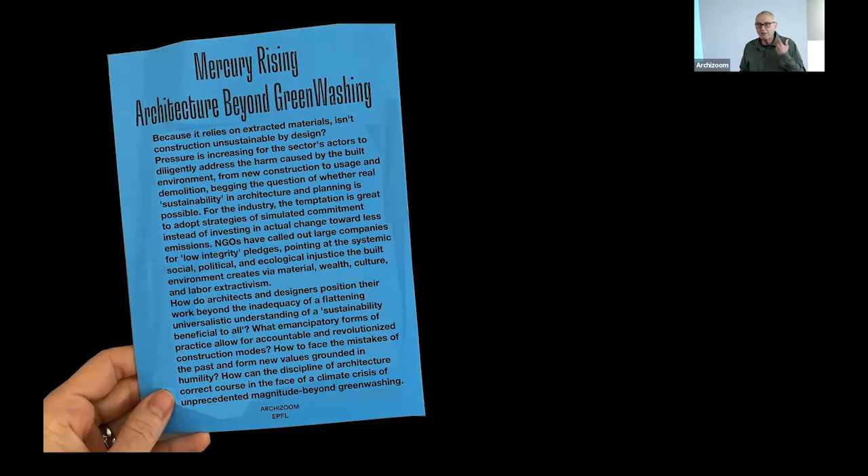And I'm also greatly looking forward to discuss with you the propositions that I have received from the faculty, an absolutely radical proposition, brilliantly written. I received this a few weeks ago, and the statement opens with a provocative question: isn't construction unsustainable by design? A question undermining the very essence of what we have been doing as architects and what we do as architects. So this is an arrow going straight through the soul.

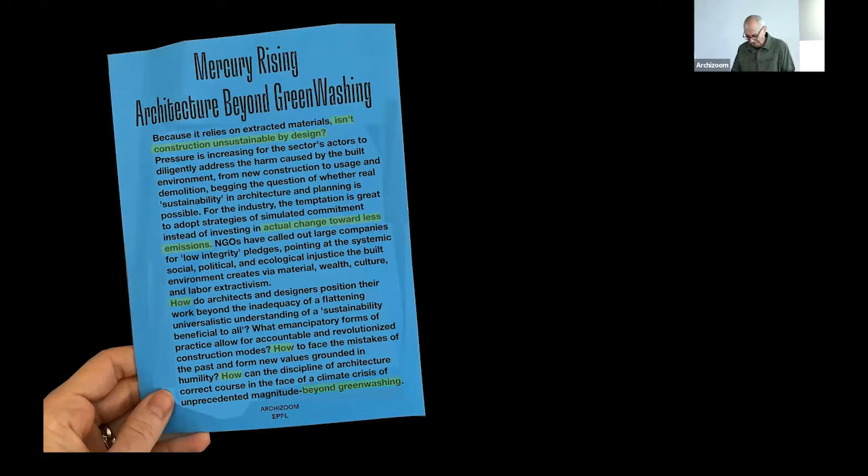The second paragraph is rather pessimistic, but there is an optimistic moment in it, calling for actual change towards less emissions. So this already tells you the direction in which we should go. Followed by the third paragraph, asking how, three times, how to face the mistakes of the past, to identify new trajectories grounded in humility, beyond greenwashing. The last two words are beyond greenwashing. So much for Mercury Rising.

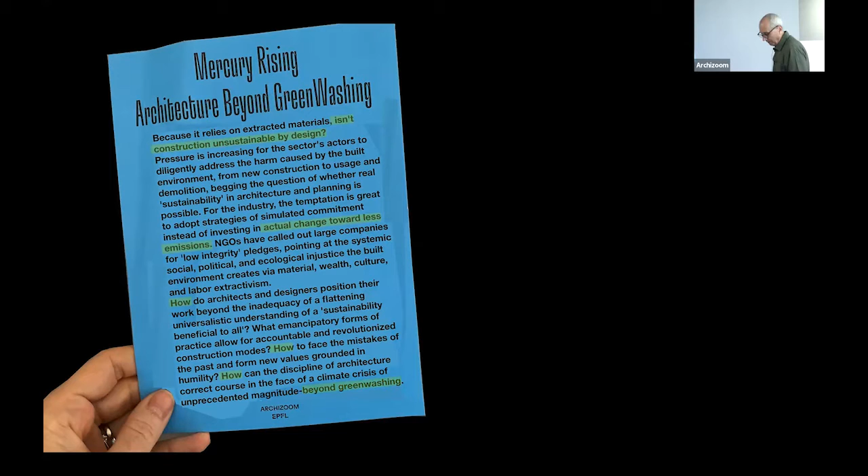I would like to address this statement by the faculty by addressing the ambivalent role of technology that is being deployed today in environment-making practice, as depicted in this illustration from a 2011 cover for The Economist entitled 'Welcome to the Anthropocene.' Whether called Anthropocene, Urbicene, Capitalocene, or Technocene, we have undoubtedly altered the face of Earth, shown here as a technical contraption in the process of being put together and taken apart, a form of geoengineering or geoarchitecture operating at the global scale.

This is the status quo condition. This contraption is unsustainable, to say the least. Any effort to fix the situation—some argue more technology is needed, a techno-fix, so to speak, to mitigate the negative effects of our actions on world climate. This takes me to the...

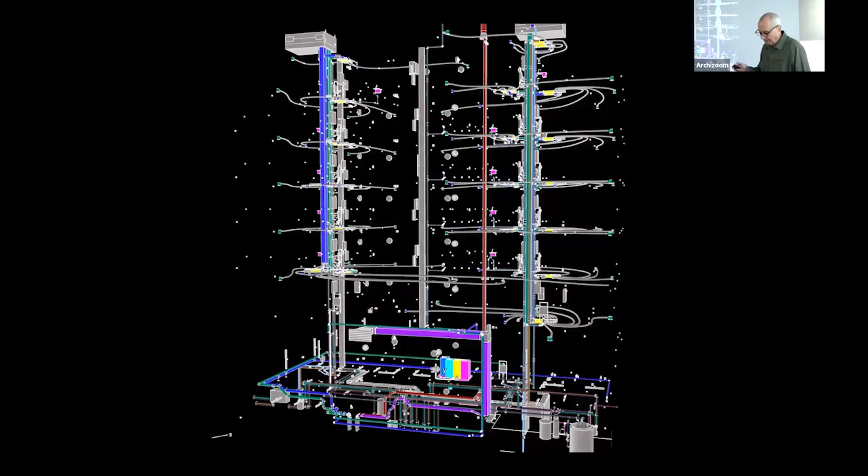theme of my lecture, namely the role of the technical systems deployed to create environments for habitation. In this case here, a recent building in Switzerland, a 7-story structure with workspaces and dwellings above, cooled by river water and heated by the city's heating grid, powered by the municipal waste incineration plant. In short, the pyrotechnics deployed today to not only create environments for habitation, but also habitats that, appearances to the contrary notwithstanding, would minimize the impact of architecture on climate.

Mind-boggling is the amount of technology needed to be sustainable. Each small dot represents a switch connected to other components, which are connected in turn to other systems—a machine in its own right, and a far cry from the call to be truly sustainable.

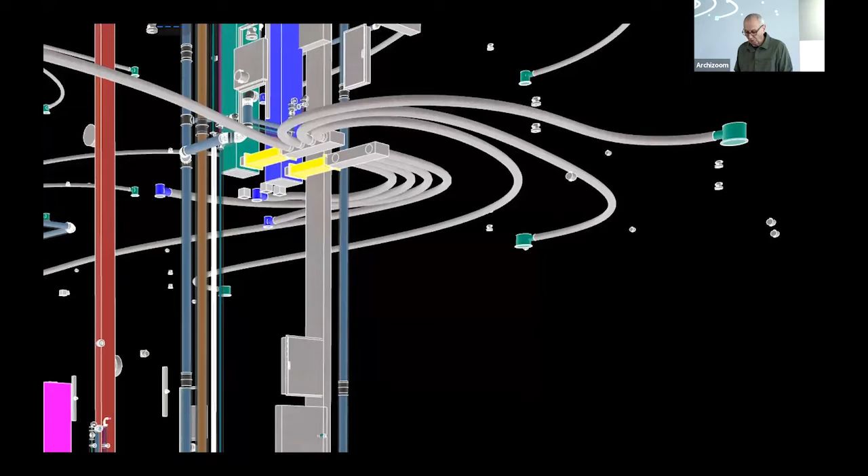My lecture is hence entitled HVAC—heating, ventilation, and air conditioning—plus water and sanitation systems, plus electricity and information technology. And is subtitled Beyond Architectural Pyrotechnics, a term coined by the Indian architect Charles Correa. These are the technologies that infiltrate our work these days, despite our suspicion vis-à-vis anything technical. We cannot simply push them aside in an act of psychoanalytical repression if we intend to address how to recalibrate the relation between architecture and its host environment today.

To walk the talk, I have organized my intervention as a shop talk on how we as architects in practice have tried in the past and try today to overcome the dilemmas associated with sustainable construction. I'd like to share some projects done in our Los Angeles and Zurich ateliers, understood as sites of architectural production, and foreground the struggles encountered when trying to act sustainably.

This is a story about failures from which we successively tried to learn. Or, in the words of Samuel Beckett from his 1983 novella Worstward Ho: ever tried, ever failed, no matter, try again, fail better. The good message for the students. The question, however, is and must be raised whether we still have the time to fail.

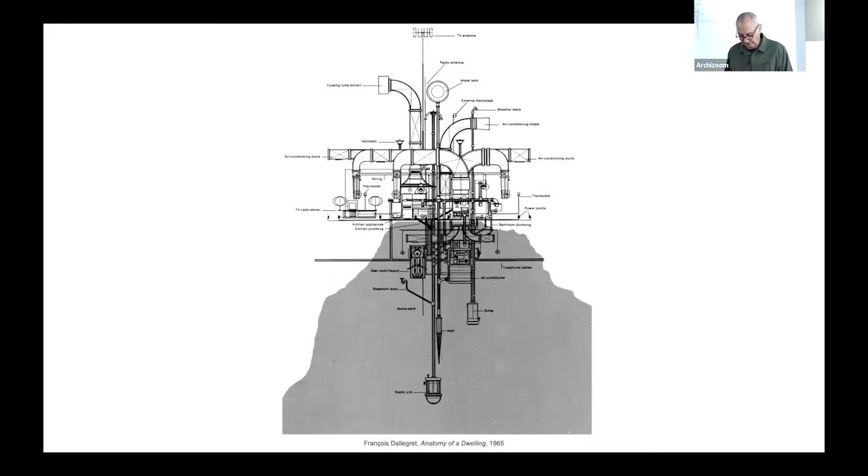Second quote: a fundamentally different approach is proposed by Charles Correa in his 1980 essay, Form Follows Climate. Surprisingly, he also talks of the building as a machine, though a machine of a very different order. From the vantage point of a practicing architect working in India, in the absence of sophisticated mechanical technology, operating from a tropical climate in a developing world, he writes: it is the building itself which must create the controls the user needs.

The house as a machine for living, controlling climate by means of verandas, terraces, courtyards, overhangs, intermediate zones, cross ventilation, the Venturi effect, solar energy harnessing, trees for shading, water as a humidifying element, using space as a resource itself.

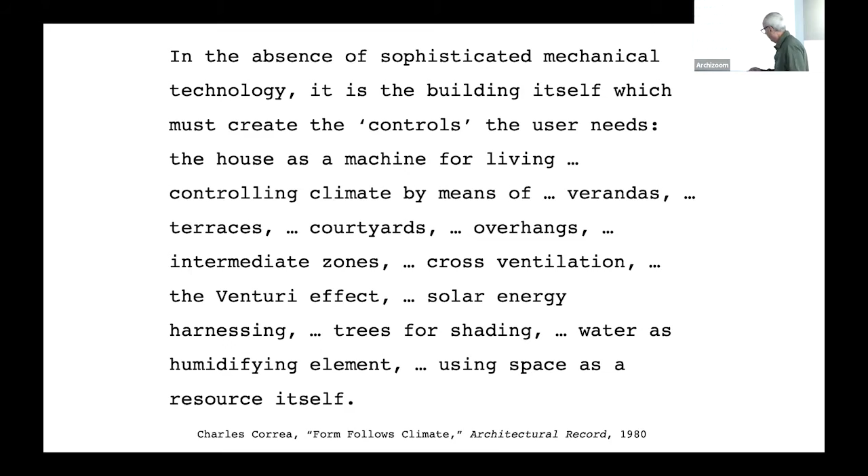Correa illustrates his idea with a section of the Red Fort at Agra, showing a sunken courtyard above which a horizontal curtain is stretched in the morning to trap the cool overnight air, providing shade during the day. In the evening, the curtain is removed, to be replaced again in the morning, and so the cycle continues.

He moreover extends his argument to the way users use the building in cyclical patterns of habitation. Correa makes a plea in favor of an energy-passive architecture, with architectural elements to control a space's microclimate—elements that could also be considered a type of technology. So architecture as a kind of technology, albeit a technology minus mechanical systems. Architecture does the job, and its form follows climate.

Third quote is found in a 1984 essay by Alvaro Siza entitled Living a House. Surprisingly, Siza also depicts the house as a machine, yet this time as a machine that breaks down and needs to be repaired. He writes, listen to the list again: the idea I have of a house is that of a complicated machine in which something breaks down every day - a lamp, a faucet, a drain, a lock, a hinge, a socket, and then the heater, the stove, the refrigerator, the television, or the video player. And after that, the washing machine, the fuses, the curtain springs, or the security bolts of the door.

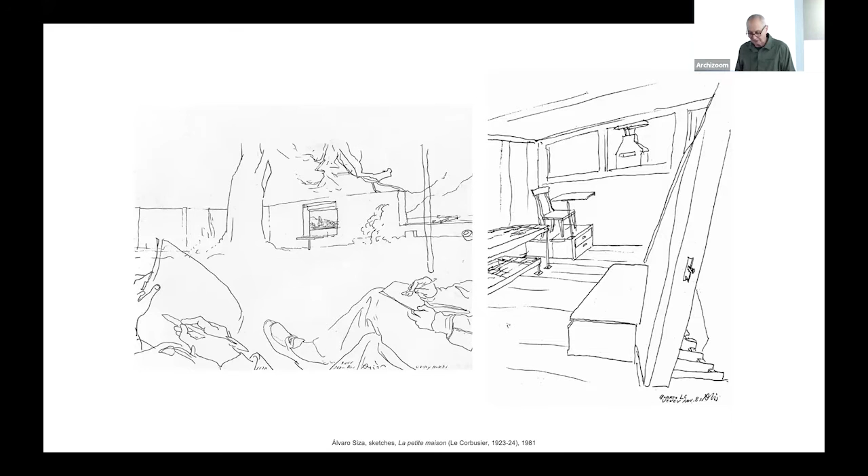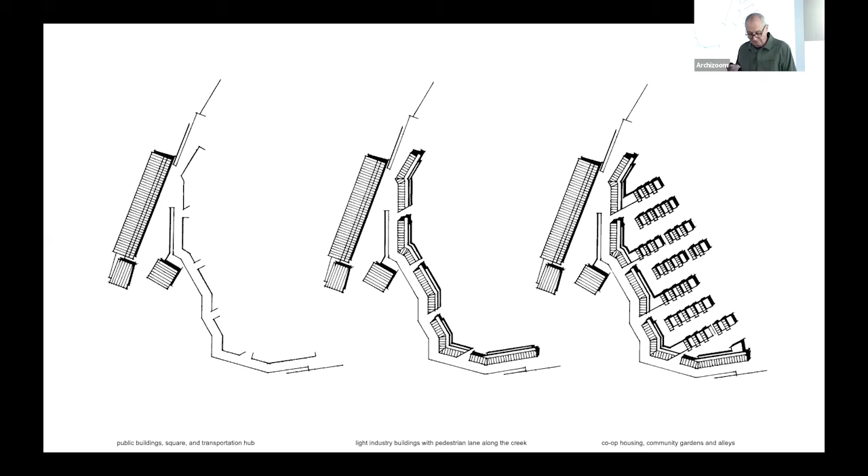So there were 3 different clients for this project. For the public part, on the left, the community, represented by the mayor, who believed in the project - this was very important that we had the mayor on our side. For the workspaces, 2 senior engineers who would evolve to become the patrons of the project, and a housing cooperative that was enthusiastic but did not have the means to build the project.

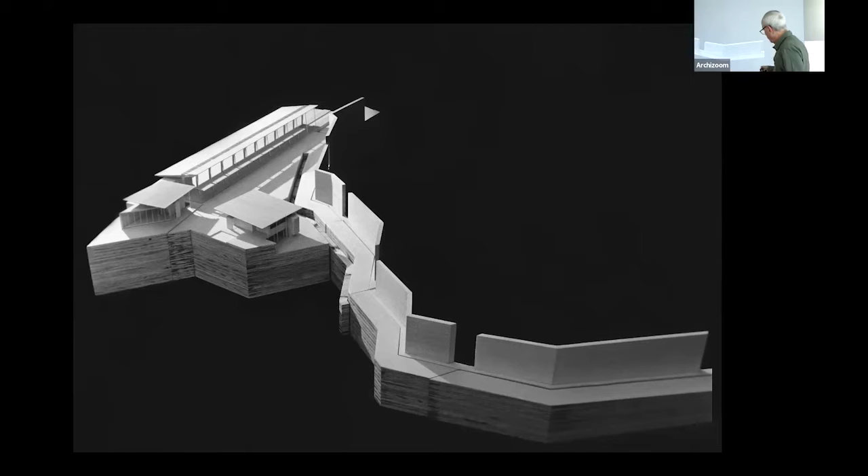In the model that you see in the next slide, the public spaces are located at the highest point of the site, and the sequence of buildings following the topography along the waterway are seen in this portion. So this is the square, the train station, the restaurant building, the post office.

A novelty at the time, the brief asked the participants to be environmentally conscious. We never heard that before in an architectural brief in 1989. This was revolutionary. The project thus evolved into a study on how to make architecture ecological before really understanding what this would entail - a way of doing without knowing, but at least with a hunch.

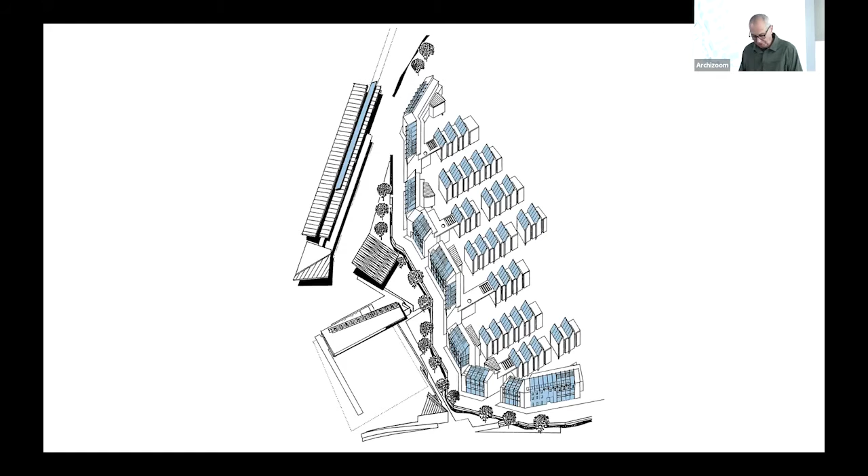So far, so good. We won the competition and started to work with the 2 senior engineers that were the mentors of the project on a manifesto that would become a roadmap for the first building along the creek. By the way, we did not know the term sustainability at the time, and used instead the complicated expression environmentally minded household management of resources. So this became the important point.

The 11-point manifesto put forth a series of action points, including the need to integrate buildings in the natural environment, to encourage multiplicity of uses, to use passive and active solar energy and natural light, to encourage the use of recyclable building materials, also with the idea to create a market for recyclable materials, and then lastly, to increase the lifespan of building materials.

As this sounded abstract, we asked the engineers to visualize the mandates, and they came up with three diagrams. The first concerns the amount of energy used, comparing a status quo building with Swiss targets and benchmarks for our building, white representing solar gains. So this was the SIA targets, this is status quo, and this is what we needed to achieve with the building.

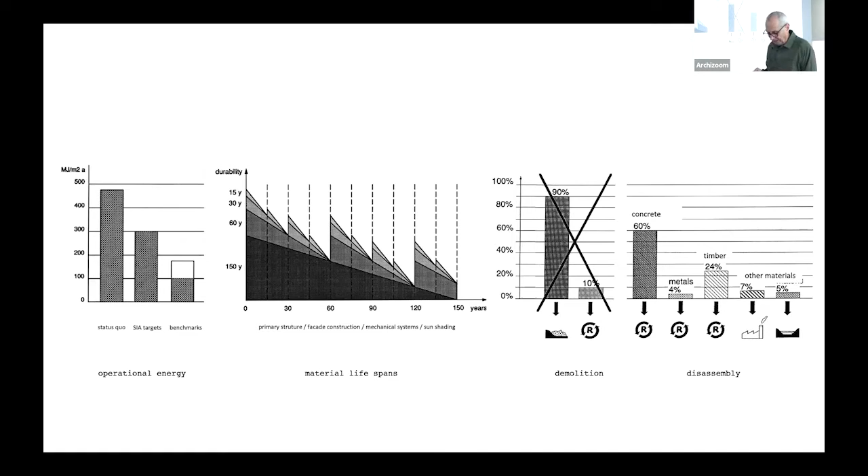The second diagram showed the lifespan of components: 150 years for the structure, 60 years for the facade, 30 years for mechanical systems, etc. So the lifespan varies on different building components. And the third diagram rejected demolition and argued in favor of recycling approximately 90% of the materials. This was an unbelievably optimistic objective.

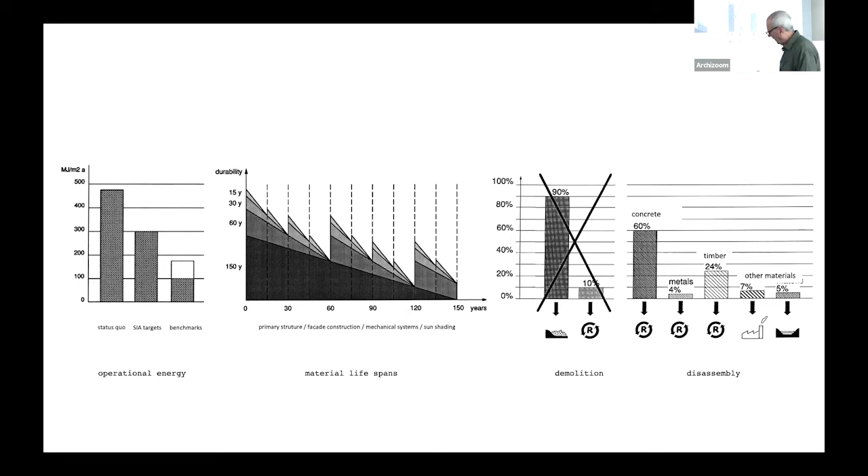Simulations showed that the Trombe wall was an absolute disaster, overheating the building. Heat recovery made little sense, as we had to wait 15 years for the housing to be built. It was nonetheless realized, and then when the housing came, it was antiquated. Efforts to convince the user to not build a heating system and simply wear sweaters failed.

As cooling and heating became important, horizontal tubes were introduced below the building to use the constant ground temperature for cooling, approximately 5 meters below ground.

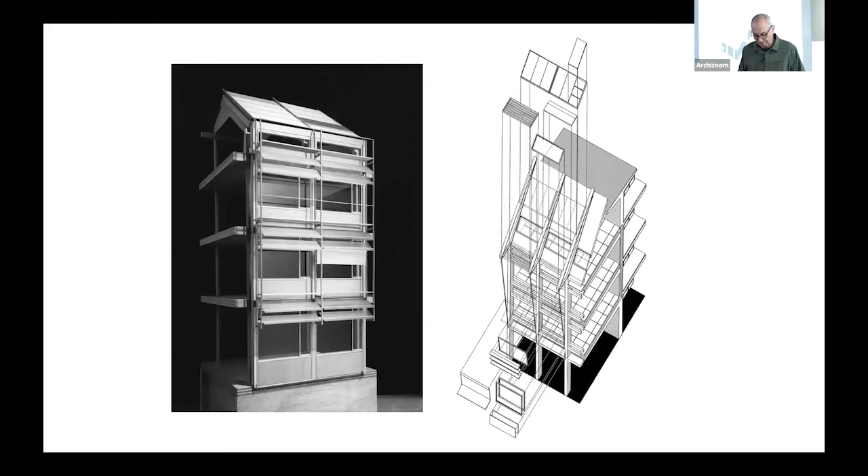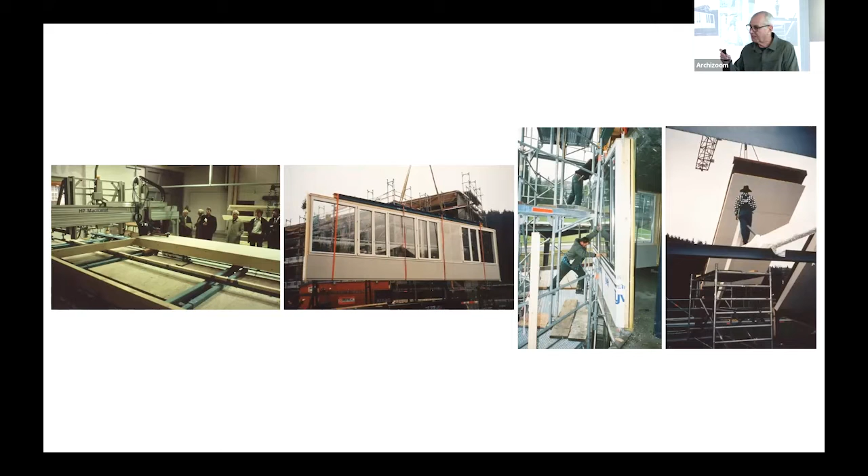Regarding the durability of components, the facade was built using demountable layers without glue. Elements with the longest lifespan were placed inside and those with the shortest outside. For the facades, local timber was used for the facade and the roof. The elements were prefabricated in local workshops and then mounted in situ. Shredded recycled paper was used as insulation material built into the prefab panels.

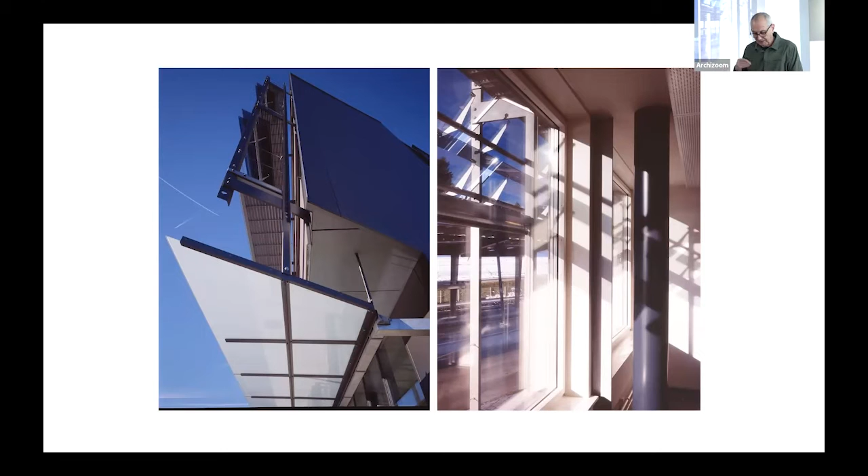Here are two images of the enclosure showing the movable brise-soleil panels that then replaced the Trombe wall, which could also act as light reflectors to reduce electricity needs, and the scaffolding used as a stage for cleaning and for repair.

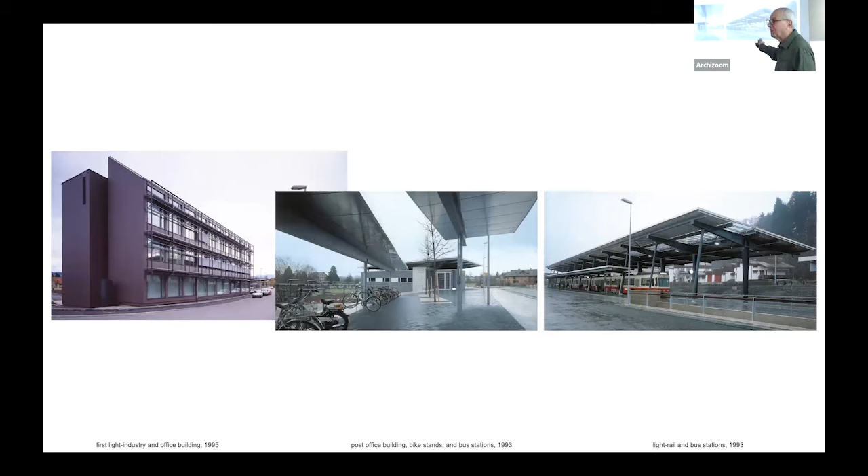The images showed the first phase of the project with the rail station on the far right, bus stations on both sides, the post office, bicycle stands, and the first building along the creek. It took, however, and it was empty for years. It took about 15 years for life to take hold, for the vegetation to grow, for the housing and the kindergarten to be realized, and the next buildings along the hill, down the hill, along the creek to be built. All in all, what we learned from this experiment...

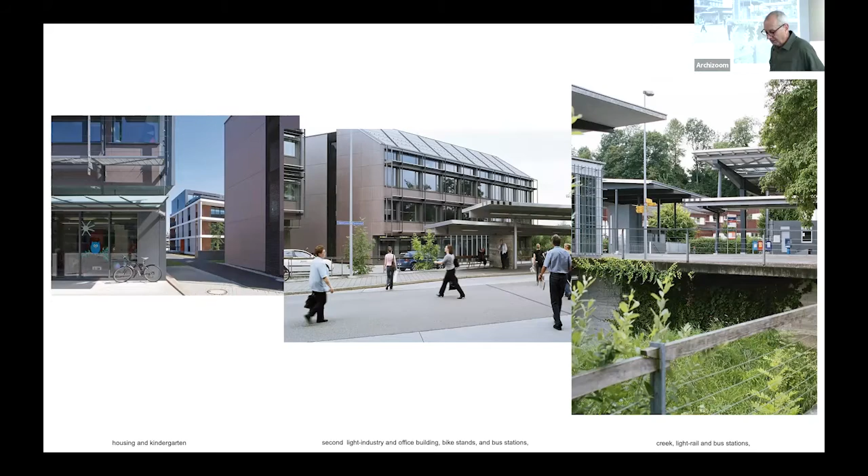Is that we still relied on too much technology to try to be sustainable. So this is lesson one.

This takes me to the second case, from the late 1990s, the airport terminal in Zurich under the heading 'stripped down.' So we had this heading in mind already at the time.

Let me start with this section, which shows the entire story: a comparison between Richard Rogers' terminal in Madrid, in light blue, and ours in dark blue, built at the same time with the same number of gates for the same number of passengers per hour. Same functions, absolutely same functions, different volumes. Ours with less volume, less energy needs, less material deployment, in line with the public client's sustainability mandate. This was also in the brief, notwithstanding that a sustainable airport is an absolute contradiction in terms.

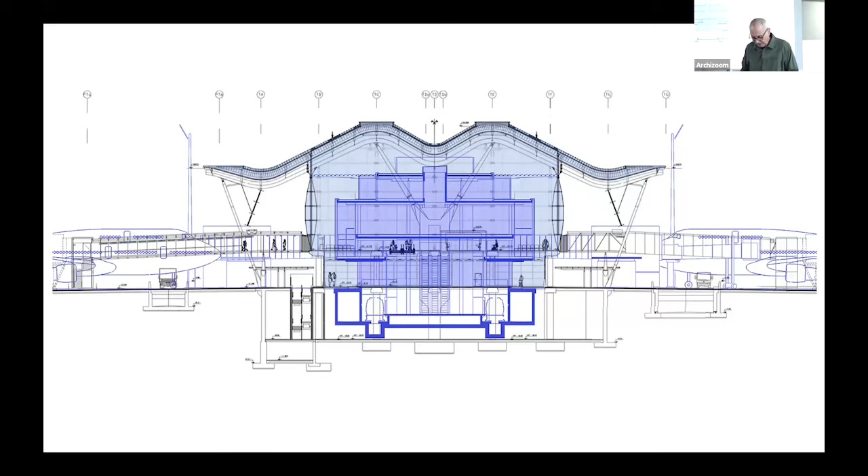She suggested that we should communicate ideas not only verbally. Architects have always had difficulty expressing themselves verbally, engineers even more so. So she said, do it visually, using images, sketches, diagrams, and the like to communicate. The first images on the table were recently built airports, be it in Osaka, Hong Kong, or Kuala Lumpur. These airports look surprisingly all the same, despite their pretense of being uniquely spectacular. They were formally exuberant, superficial, overscaled, disorienting, and overly commercialized.

They were all the same. I mean, we went and visited them—absolute horror. This led to a discourse on form within the team and to the decision to pursue a project without form.

So, no form. As for technology, the engineers would have to aim for less and less mechanical systems. This was their mandate, so we said no tech as the key maxim for the mechanical systems, with the idea in mind to reduce greenhouse gases, at least for building operations. We are early on in our thinking, so no greenhouse gases for building operations.

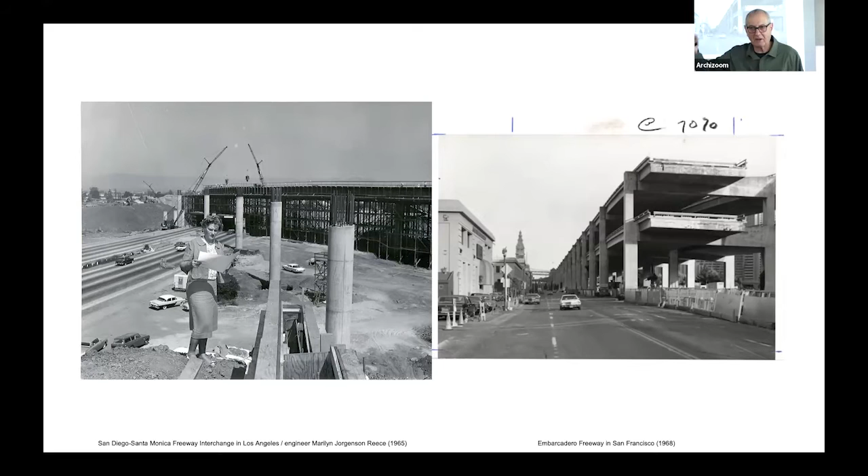By the way, that's an expression by Le Corbusier—a naked airport. This led to a formless building, an undecorated shed, reduced to the max and based on the premise to do less with less, its boring appearance notwithstanding. There's nothing wrong with being boring in terms of form.

The piles were used in collaboration with the engineers, the structural engineers and mechanical engineers, to heat and cool the building—in effect, harvesting the energy in the ground, cooling in the summer and reversing the system for heating in the winter without using fossil fuels.

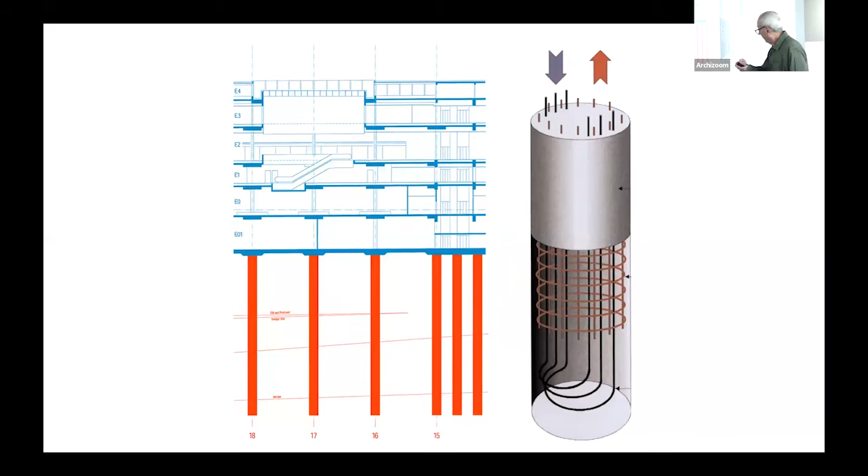A model photograph shows the building sitting de facto not on the tarmac level. The tarmac level is this one here, so this is where the airplanes are, but on the sloped bedrock below. So all these vertical lines are the piles to anchor the airport on site.

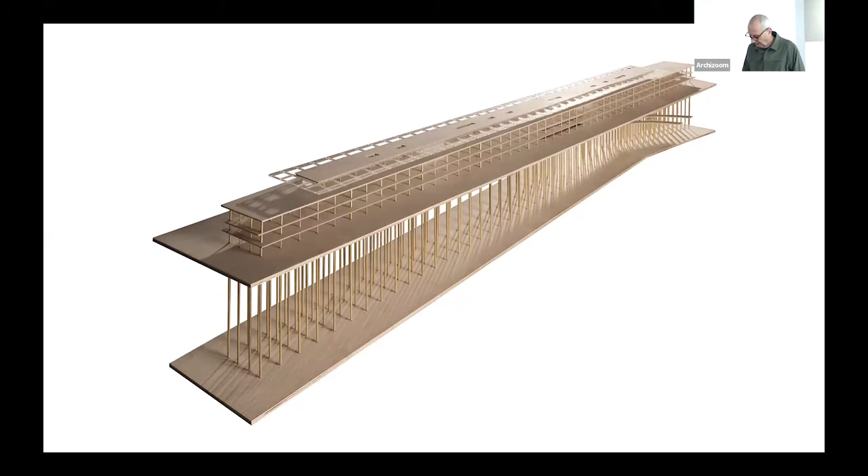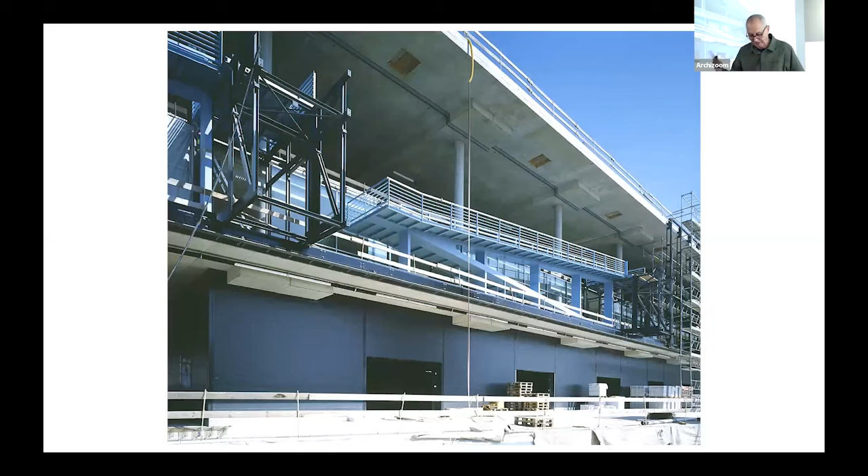The construction piles determine the placement of columns above, so there was a relationship, and vice versa. The bigger the span above, the less foundation piles below, the less energy could be harnessed. So there was a kind of effect, one affecting the other.

The section shows that both passive and active systems were used to minimize the resources for building operations. So the geothermal probes at the bottom, active and passive, the thermal buffer zones on both sides, kind of a double skin as a sweater—passive. The Venturi effects in the light cores up here, natural ventilation—passive.

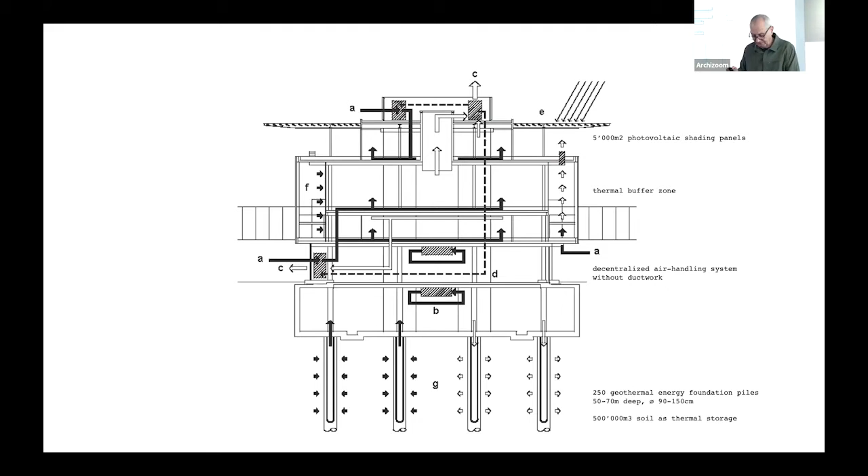Decentralized air units without ductwork—so here, wherever we had a spot, we put these units, so without ducts, but active. Photovoltaic shading elements on top on this pergola, active and passive, and a maximum of daylight to reduce electricity loads for the entire building—passive.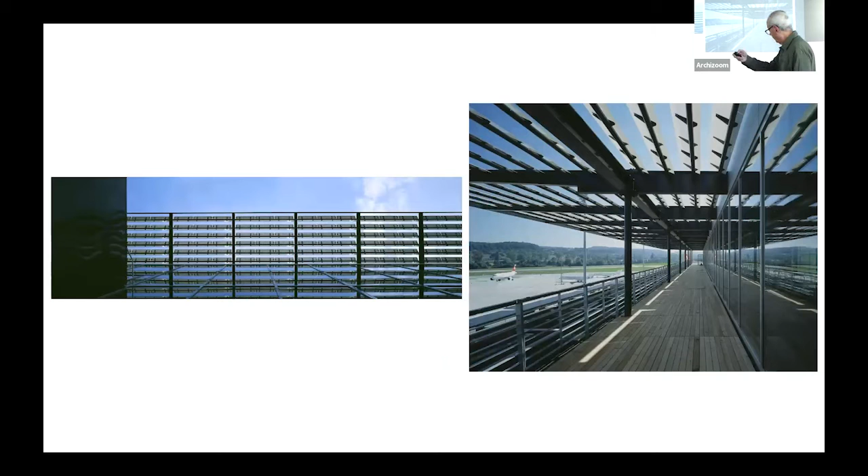A few images of the completed building. First, the solar panel pergola on the roof, the unheated buffer zones that you see here with the ramps to access the planes, and the departure level punctuated by air ventilation cords that you see here. All materials are exposed—nothing is covered. What you see is what you really get. So if you knock on the walls, it's not hollow.

An analysis of the building made after completion, comparing terminals, showed that we indeed managed to reduce the operational energy needs per year. So we are the last bar here on the side, and the biggest gains in red for heating, in this case here, of the building. So this was a success.

Nonetheless, lessons learned from this project is that we would need to shift our focus in the future from a focus on operational energy to the materials' embodied energy. I mean, the amount of materials we used for this airport was mind-boggling, was crazy. In German, you say Materialschlacht. So this is what we got.

So this embodied energy became an obsession for us—the energy that is required to produce construction materials and products. This is standard practice these days. So this is what we try to do with the next project, the headquarters addition for the International Union for Conservation of Nature in Gland, under the heading Balancing Performances.

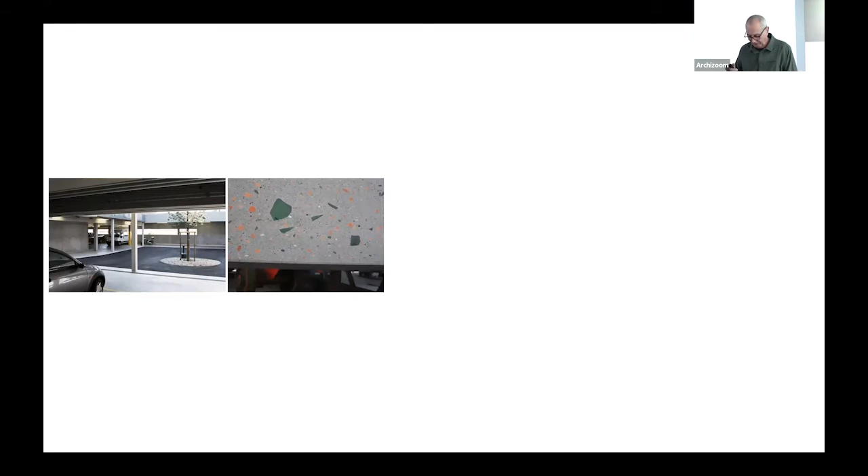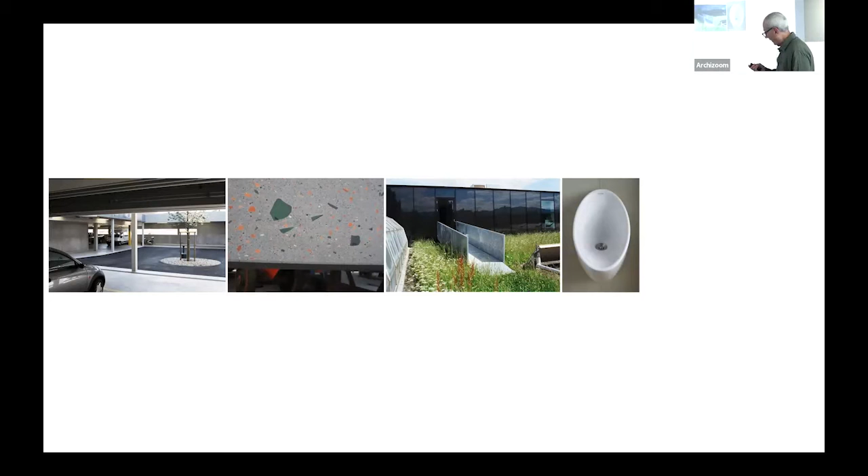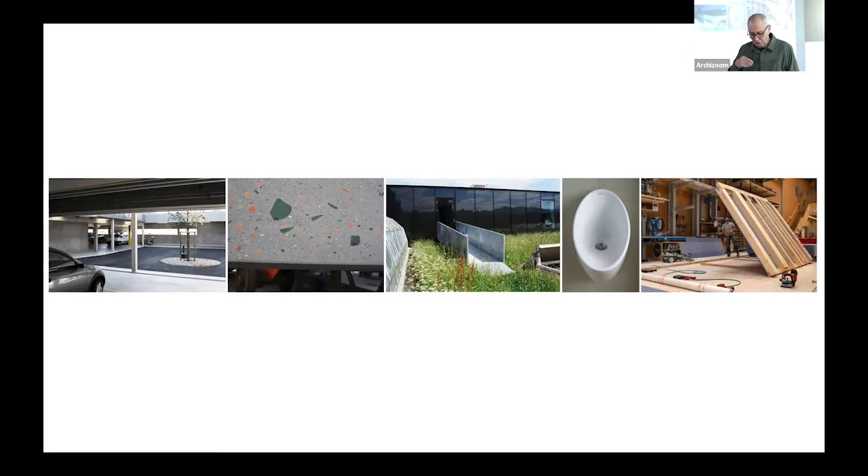Recycling concrete from demolition sites permitted the use of a synthetic rubber membrane. Greening the roof of the existing building increased the site's water retention capacity. Waterless urinals compensated for the ecological impact of kitchen appliances, and using wood for the facade in this image allowed us to increase the amount of glass, which in turn reduced electricity needs, and so forth.

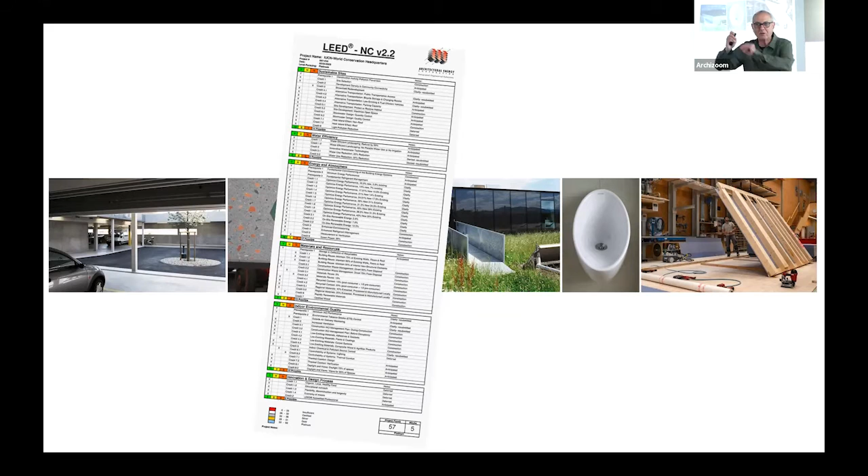This was summarized in the chart you see here, essentially forcing us to design by numbers. Each time you put something in, it was calculated - you could do this, but you had to balance it out by doing something else.

A meeting with the cooks of the canteen, which didn't give us any points for the LEED standards, proved to be beneficial in this regard, considering that the amount of energy associated with incoming food and its preparation was astronomical. So the menu had to be redesigned, and I was sitting with them redesigning the menu, putting a premium on local products, using less meat and offering non-heated dishes.

For the addition, we decided to turn the principle inside out and basically switch what was an inside, outside. So this was the concept for the building.

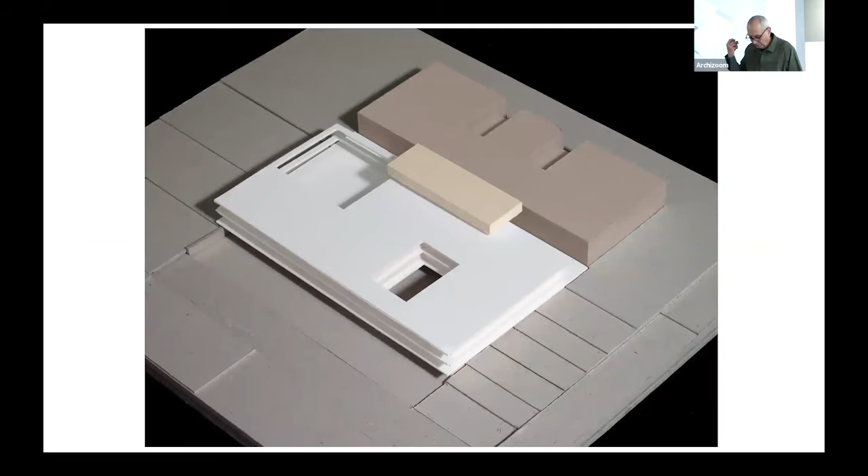In the model, the extension here in white was conceived as a mat building, punctuated by courtyards and surrounded by a veranda to passively shade the facades. A series of diagrams: green, the heated spaces; yellow, the outdoor courtyards; blue, the internal double-story spaces; red, the cores; and purple, the veranda as emergency egress and buffer between inside and outside.

Do I need to respond to this? No.

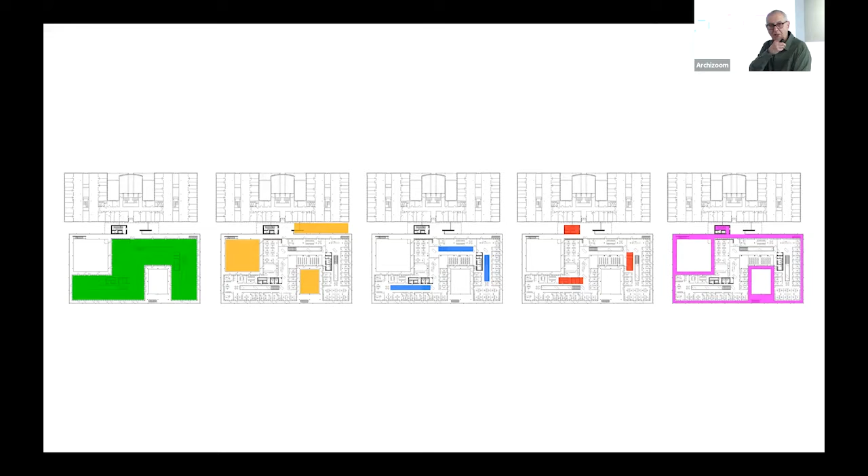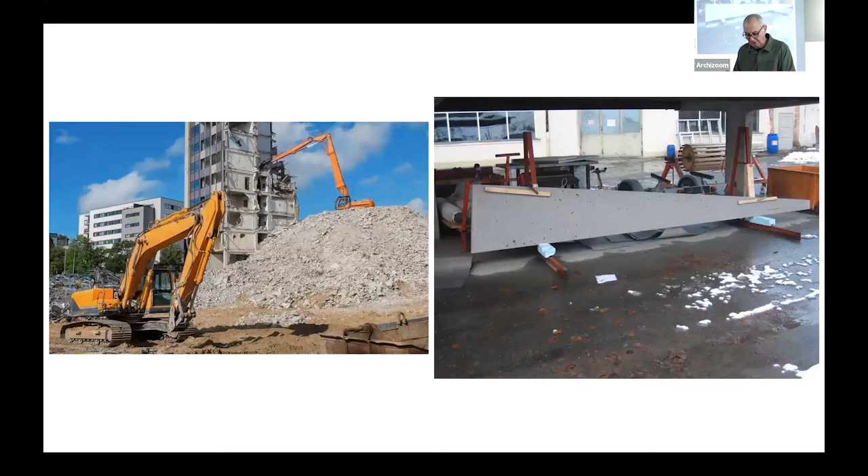Moreover, the team collaborated with the concrete industry, testing various applications: reusing crushed concrete from demolition sites, thereby recycling concrete - successful; reducing the CO2 content of concrete - less successful; and increasing the insulation value of concrete - partially successful.

The construction is a hybrid combining timber for the facades and roofs and concrete for the primary structure, with a minimum of steel where needed.

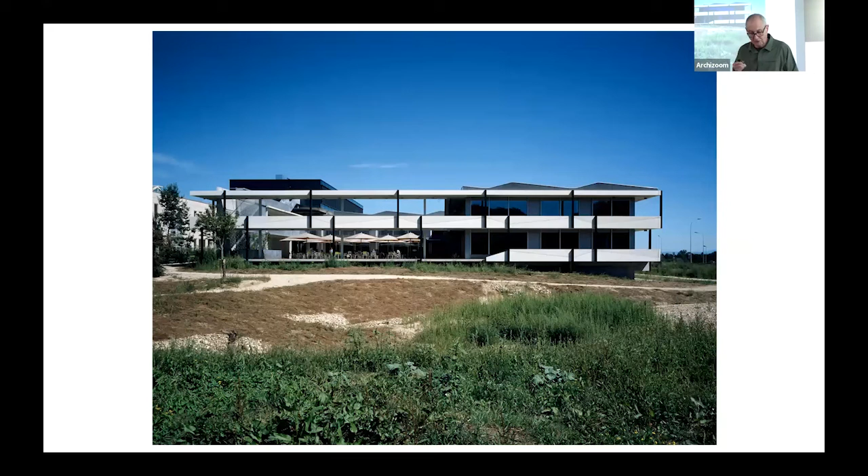The next slide shows a view of the completed project seen from the entry courtyard, situated between the existing building on the right and the addition on the left, with an external photograph showing the main courtyard in the center, the balcony circumscribing the building, and a view into the courtyard a few years after completion, which turned out to be the most important space of the ensemble.

One additional remark concerning the approach to on-site landscaping: instead of designing an attractive garden with landscape architects, we worked with biologists and botanists who decided to leave the landscape as is. They said don't do anything, with sheep from a nearby farmer maintaining the premises when need be, an approach requiring a change of mindset for all parties involved. I can tell you our landscape architects were not happy about this.

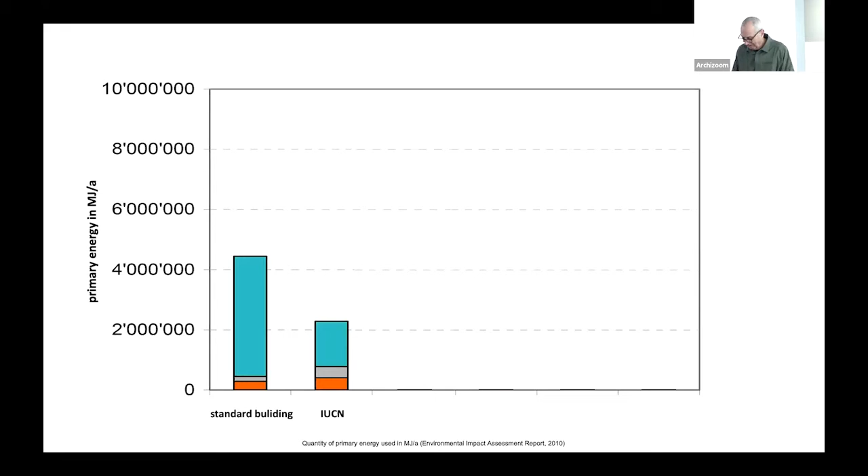But when other components are brought into the picture, such as the energy used for furniture, IT equipment, commuting, and air travel, it became clear that air travel far outbalanced the energy that went into the entire building, by a factor of 4. It's an international organization—they had to fly constantly to Nairobi or to New York. In any case, IUCN had to change its practices, and I would say the pandemic helped tremendously for this.

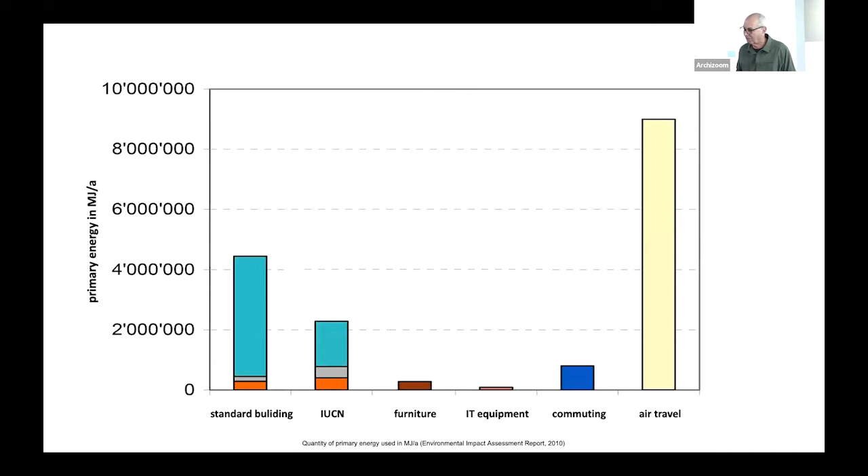Allow me to show you another metric, at the risk of sounding like a nerd, concerning quality. Before I showed you the quantity, now I'm showing the quality of energy, measured in kilograms CO2 per annum. Revealing is that we used more embodied energy for the materials, shown in orange, than the standard building—this line is higher. And we used more technical installations, in gray, in order to reduce operational needs. So more technology and more materials in order to achieve this reduction in CO2 emissions.

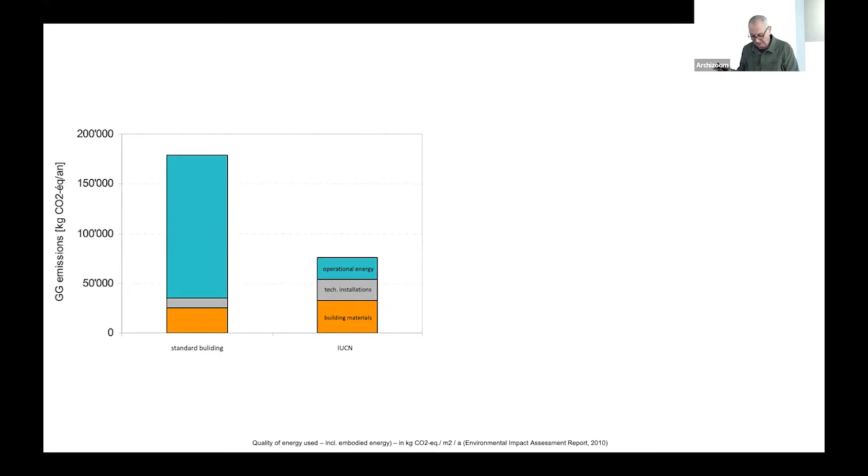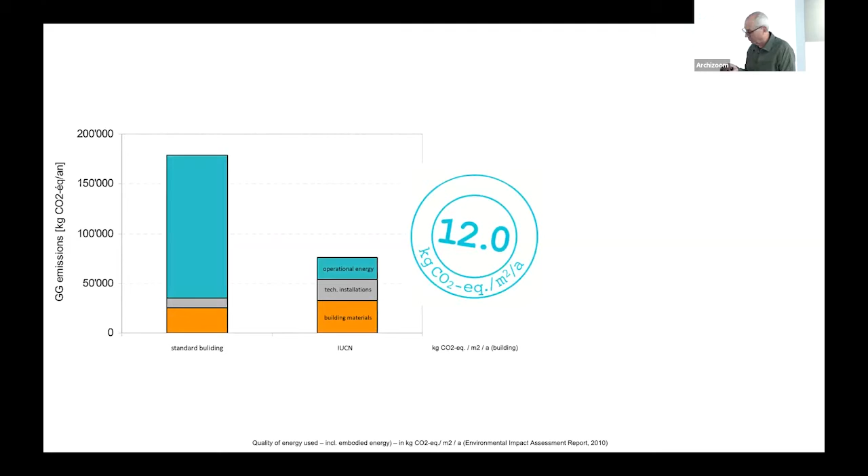Partly this is also due to satisfying too many labeling standards that were contradicting one another. Now translated into square meter emissions, the building required 12 kilograms CO2 per square meter per annum, a calculation that takes the lifespan of building components into account. When you include daily commuting, the number goes up, and when you include air travel, all gains are lost. This is an unbelievable number.

By the way, kilogram CO2 equivalent per square meter per annum is the new unit—as architects, we have to know this unit, it is the new unit to deal with in architecture. So square meters we know, kilograms CO2 we can understand, equivalent means it addresses other things, per annum is also clear. So everything is in there, including replacement of parts.

What we learned from this exercise is that current energy labels, supported by lobbies in the construction sector—there are lobbies behind them, don't forget that—are often counterproductive, leading to more material and technical deployment in order to be sustainable. So from then on, we decided to go our own way, and we criticized these standards publicly and politically.

So let's move to the next case, from the mid-2010s: our entry to the Guggenheim Helsinki competition, which was awarded second prize, under the heading 'On the Grid'—that's its title, since we conceived of the building as a public utility.

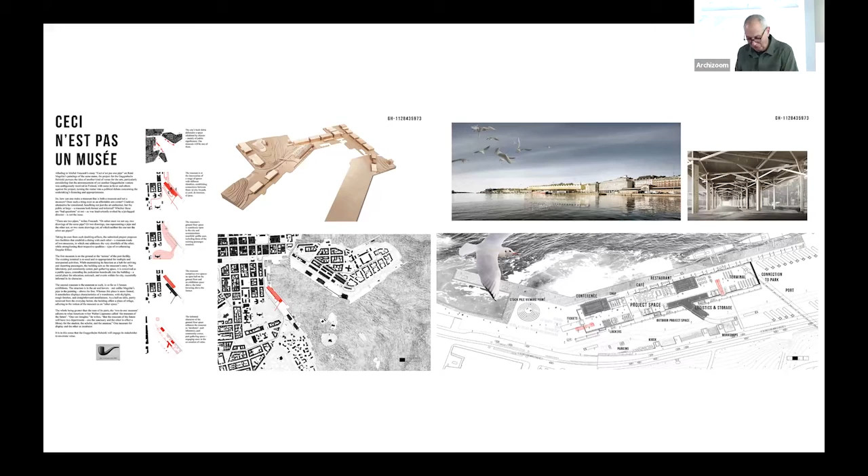Our scheme was simple: we kept the existing terminal and added a box on top—a sketch, by the way, done by Matej Drasla very quickly on the desk.

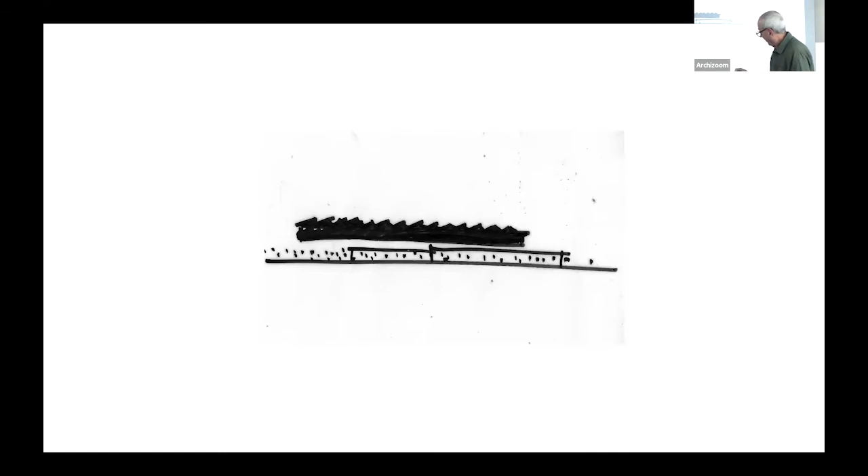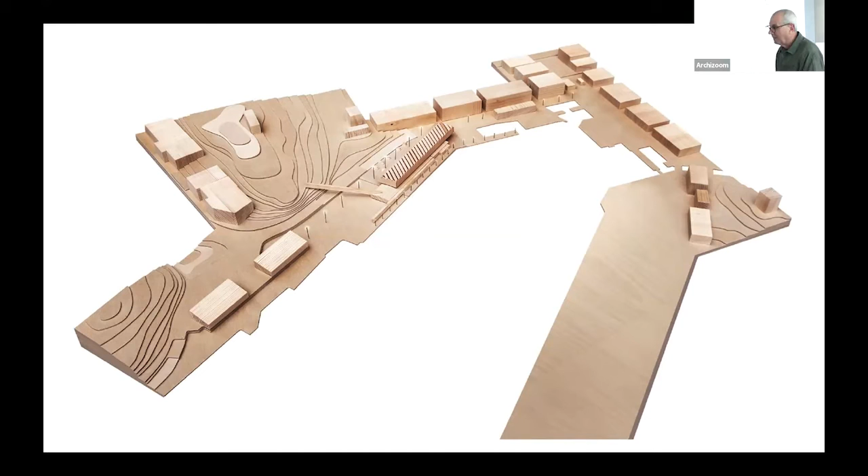So this is what you see here, the box and the terminal and the box in the model, okay? This location, a model done by Frederic Hans, who is one of the junior faculty members here at the school, and I think he's online somewhere in Kyoto watching.

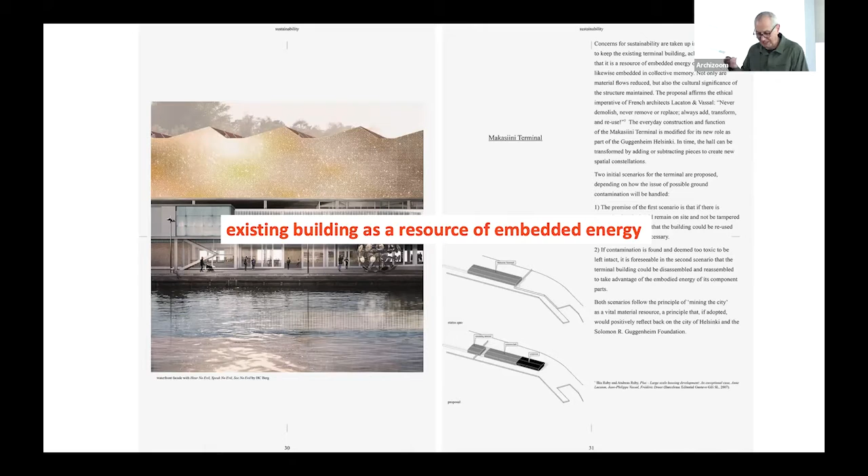The submitted sustainability report comprised 3 pages. The first page made a plea to reuse the existing building, the Makasiini terminal as it was called, taking the existing building as a resource of embedded energy, in line with Lacaton Vassal's statement: never demolish, never remove or replace, always add, transform, and reuse.

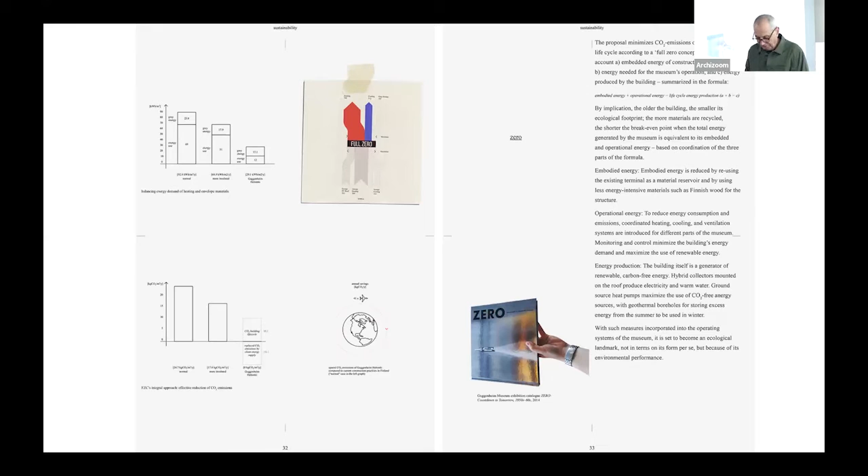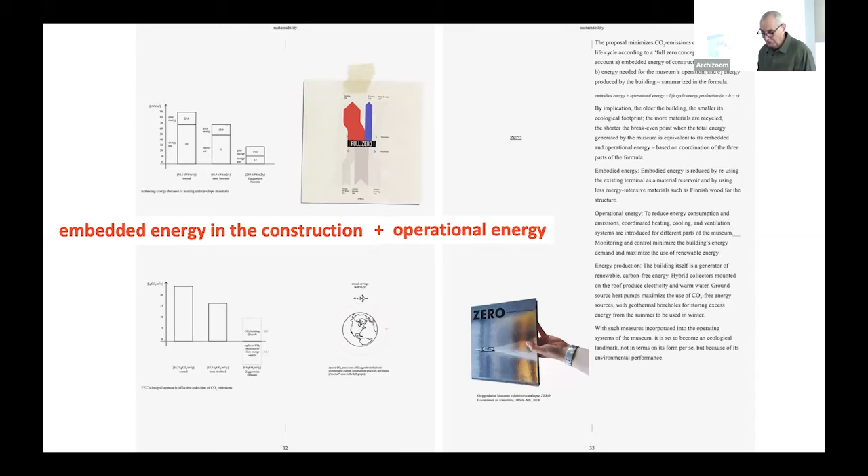The second page addressed the notion of a full zero concept, not net zero, which has evolved into one of the biggest corporate lies imaginable. For this, we presented a formula which read: embedded energy in the construction of the existing building plus our new construction, plus operational energy, this is what happens every year, equals 50 years of energy production by the building.

By implication, the older the building, the smaller its ecological footprint. Measured in kilogram CO2 emissions, this meant that the construction was initially using 15 kilograms CO2 per square meter per annum - this is where the biggest amount of energy is plugged in when you build something. You would need 50 years to get to zero, under the condition that the building produces more energy than it needs. So you have always a surplus, and with this you compensate what you've put in terms of energies for the materials and products.

This revealed that Helsinki's objective to reach zero by 2050 was off by 20 years, if not more. I know we had long discussions with the mechanical engineers whether this would be 70 years or 80 years, okay? And at the end we said, come on, it's a competition, push for 50.

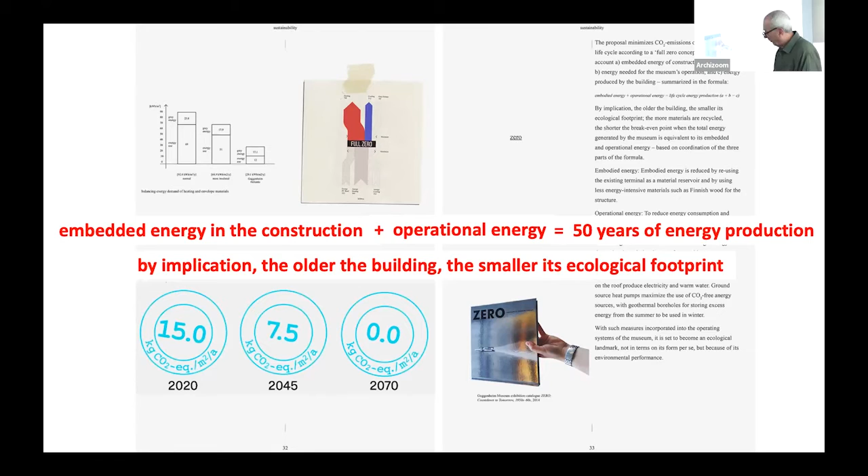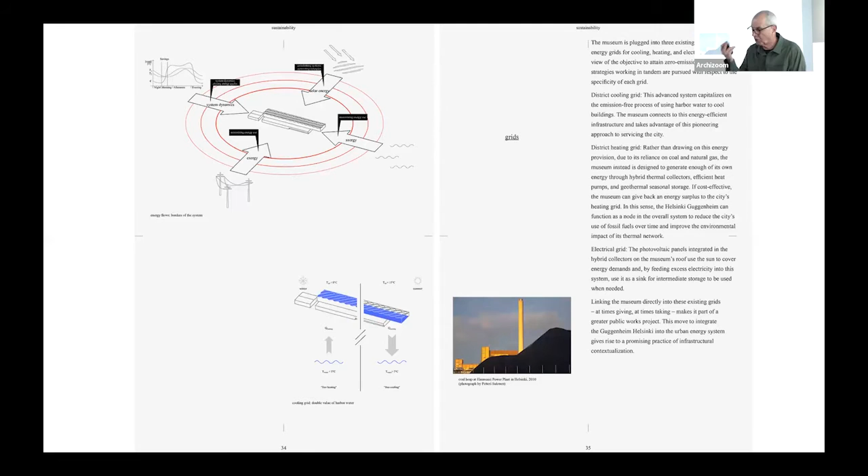The third page outlined how we would do that by plugging the building into existing municipal grids using their storage capacity. The storage energy is becoming more important from project to project. So plug the building into existing grids using their storage capacity.

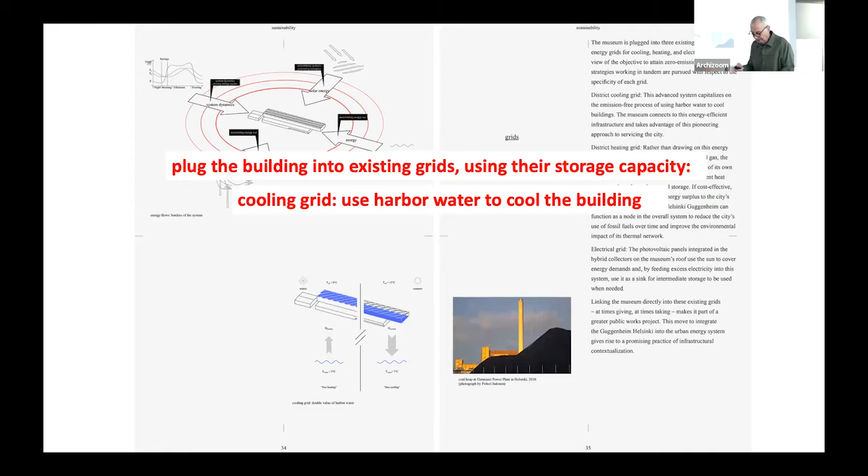First of all, the cooling grids that used harbor water to cool buildings, existing and newly built. The electrical grids to feed electricity into that grid and draw from it, which has become a standard. I just heard in California that this will not be allowed anymore - that means we will have to have batteries, which is totally stupid.

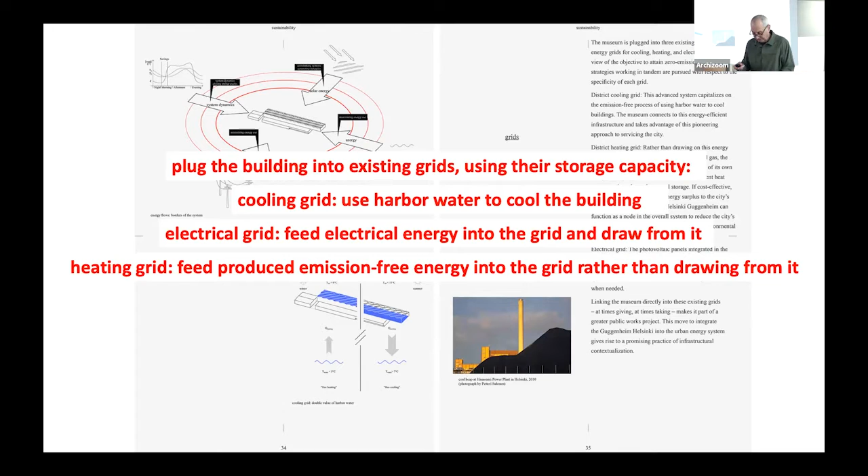And then the heating grid, in which we would feed emission-free energy instead of using energy from a nearby power plant that used coal as a resource. So basically, we said no coal. Coal, by the way, imported from Russia at the time.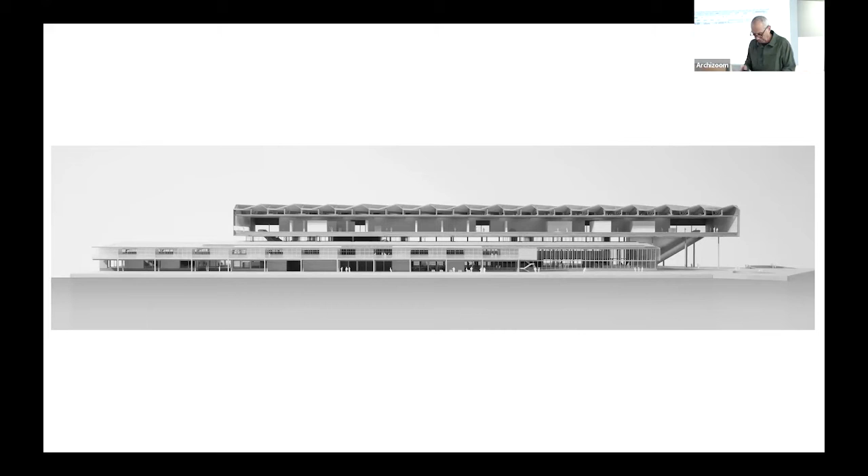The water and the sky were key resources for the project. Lastly, a view across the harbor toward the project, simply a line on the horizon. It was one of the projects among this unbelievable amount of entries that had the least form to them - just one line.

Lessons learned: to get to zero, you need to produce more energy than you consume. That is not any kind of energy, but as emission-free energy as possible, while nonetheless trying to reduce what you consume. You need to reduce that in any case.

Let me end with a recent project, a ranch in the California countryside under the heading off the grid. So the previous one was on the grid, and this one is off the grid. The project, or more precisely the entire ranch, is off the grid and almost self-sustaining. The building is comprised of several habitable spaces surrounded by terraces, all under one big roof facing south for shading, water collection, and solar harvesting.

An architectural critic called the building a machine in the garden, though as a matter of fact, it is rather the garden that is the machine. So let me focus on the garden and the site as a resource for the project. The main objective of this project was how to resource the site itself.

Note the thin line here reaching into the ground - it is the project's umbilical cord to the aquifer. As a matter of fact, the most important machine is the pump connected to that line, accessing a 150-meter deep well for water supply, used to cool or heat the structure. So we are using the temperature of the water to cool and heat the building, taking advantage of the constant ground temperature of 16 degrees Celsius.

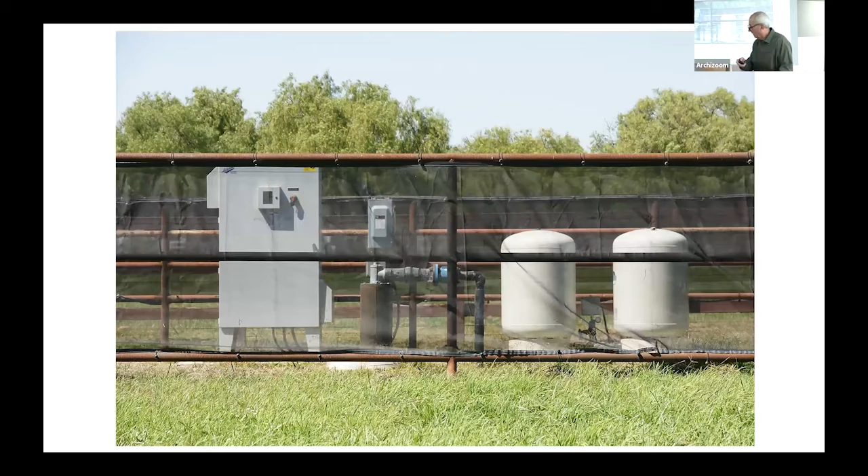Solar panels power the water pump and provide electricity for the entire ranch.

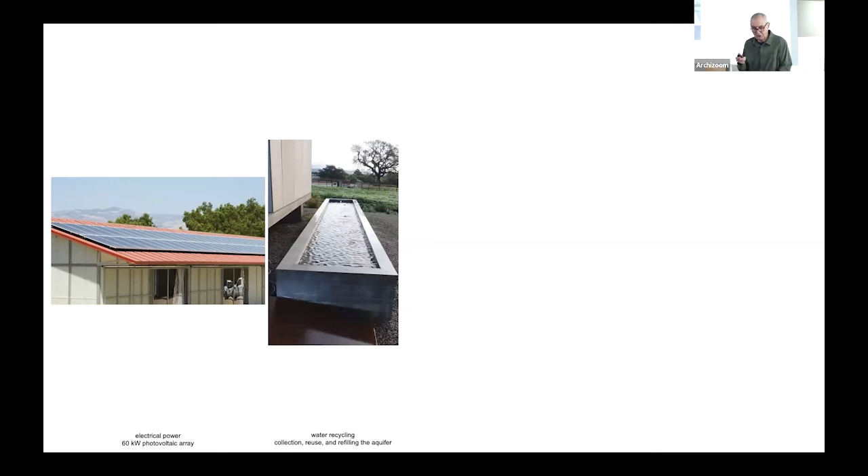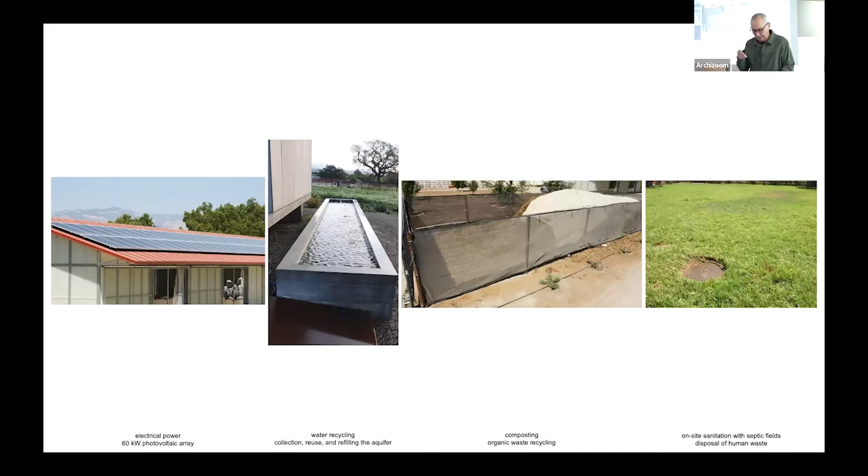Cisterns collect rainwater to replenish the aquifer. The compost recycles organic waste for reuse on sites. It's bigger than my apartment in Zurich. And septic fields provide on-site sanitation for human waste disposal. Most important, every plant is eatable, ranging from vegetables, fruits, and peppers, very hot peppers, to crops for animal fodder.

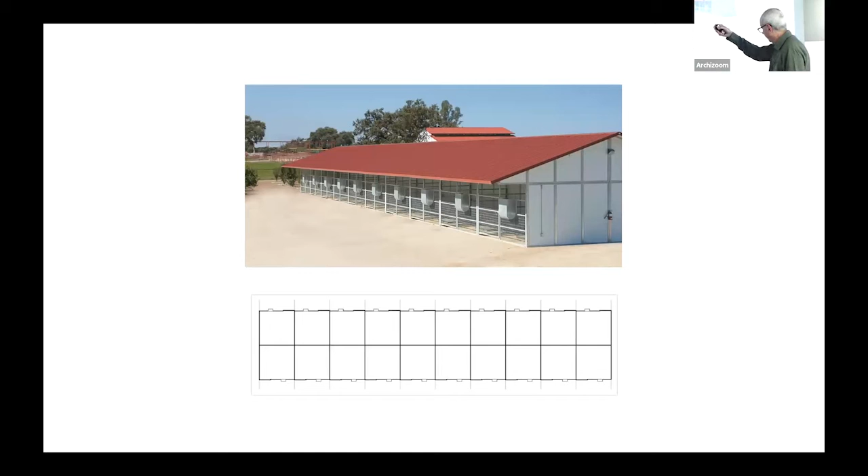These are the ranch inhabitants: 11 humans, 16 horses, 3 dogs, 22 chickens, 3 geese, and 2 cats. Not to mention the assorted wildlife that wanders onto the premises.

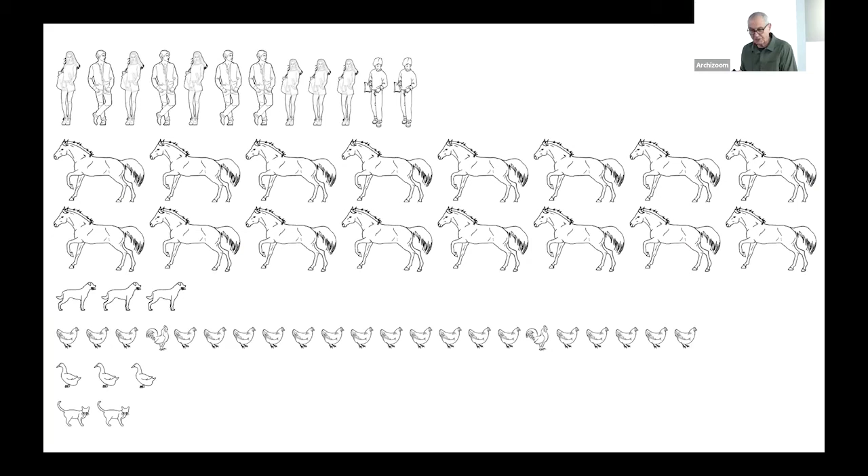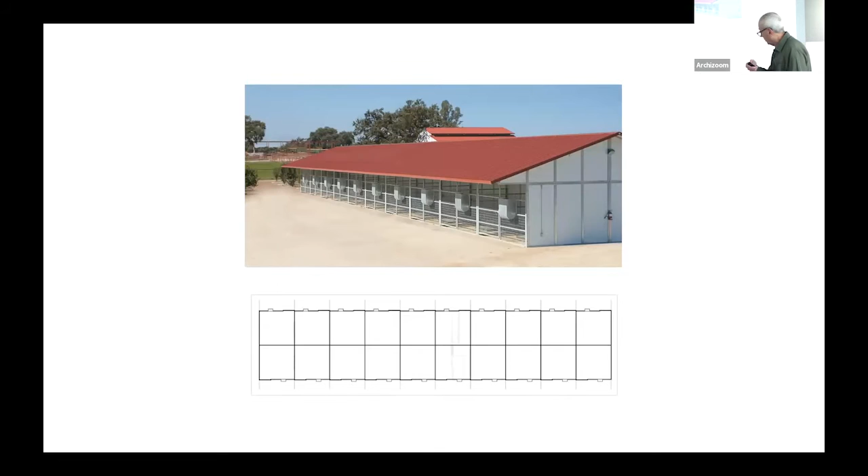There are several buildings on site, among them a barn that was transformed into a habitable structure for ranch activities, keeping as much as we could and replacing as little as possible. Modifications were done with components sourced from on-site structures, initiating a literal material dance across the facility, including panels, walls, gates, and the like.

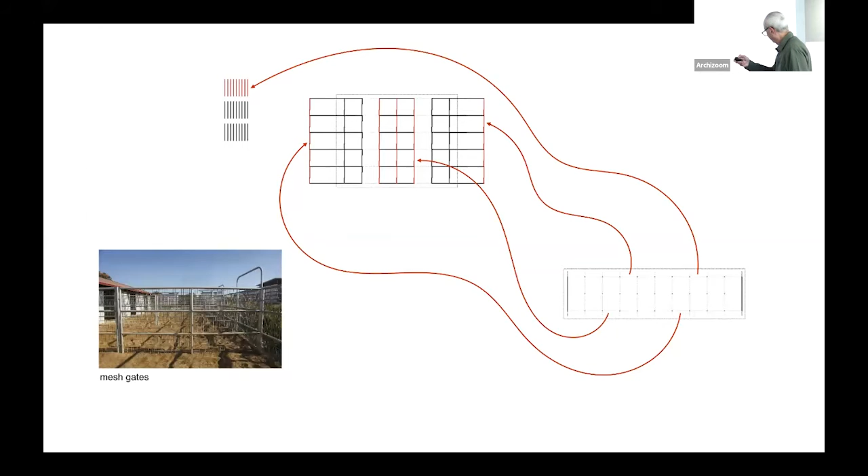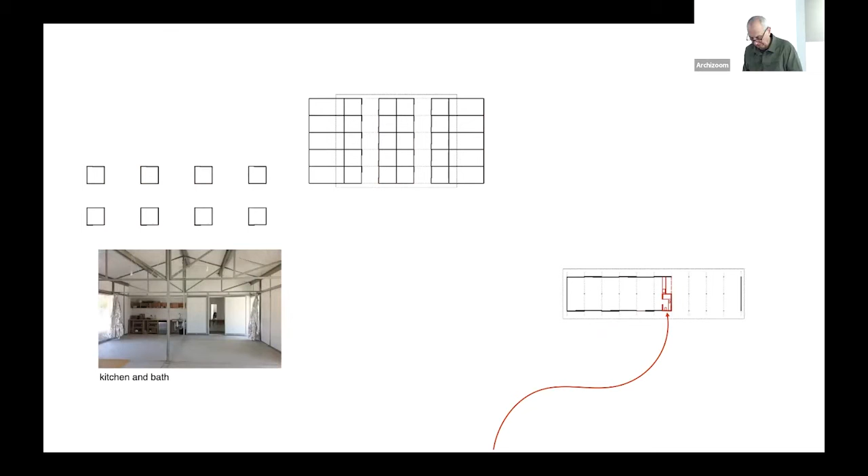These incoming materials were selected from agricultural catalogs. We have an entire collection of agricultural catalogs, among them FarmTech, a regional company with a yard close by, so we could go and see the materials, and they were offering products that are local, robust, functional, and cheap, including components for prefab barns, which we used to upgrade the structure frame.

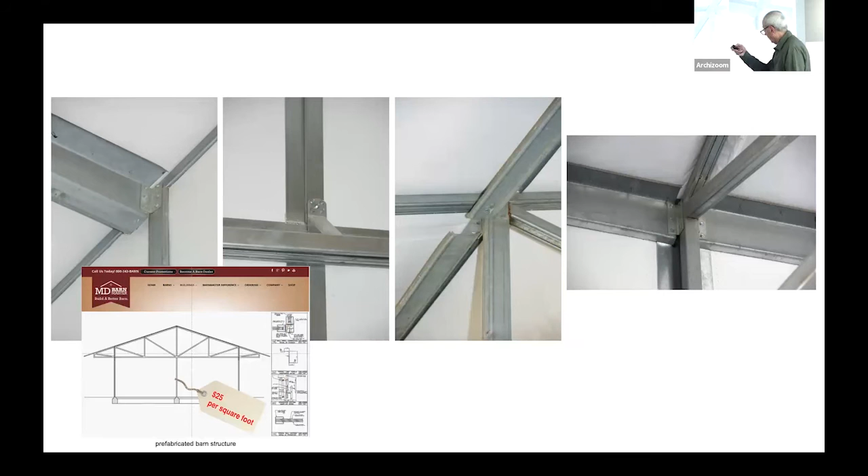Or recycled plexiglass and fiberglass for the facades, and mylar for curtains providing thermal insulation, and multiple other components such as cables, tape, cardboard, light fixtures, and standard tubing. Extremely cheap materials that were assembled without fuss, no Swiss details here. You have to just bang it together.

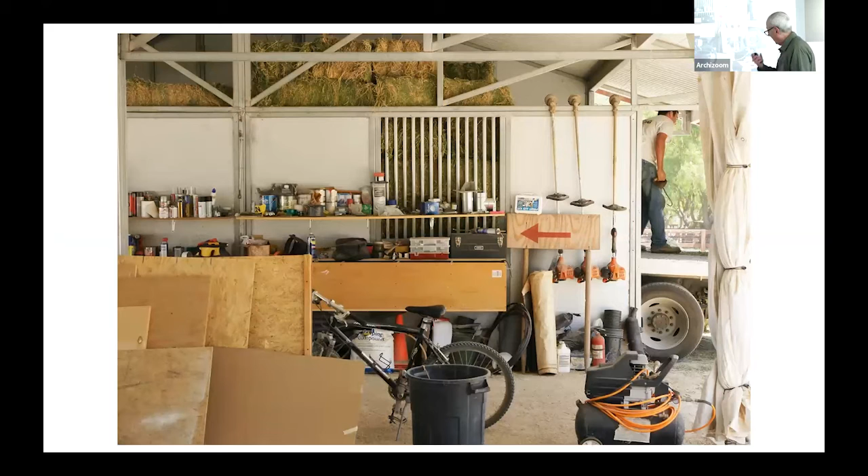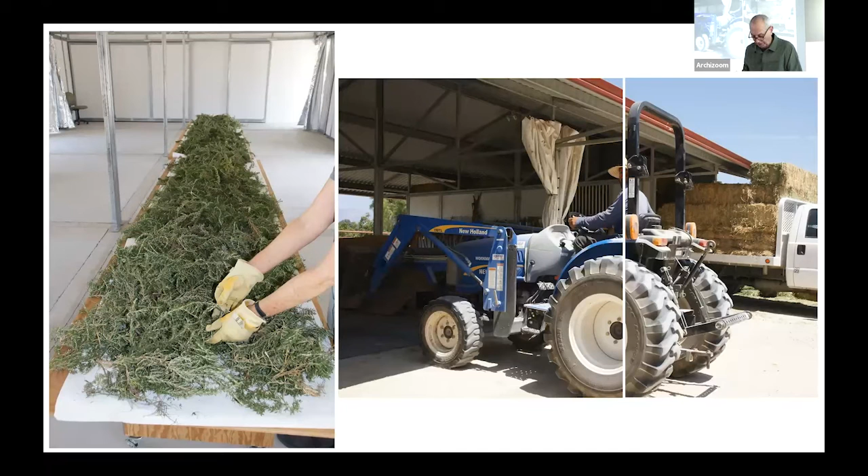Furthermore, the space is used for cleaning and drying agricultural products because it's our operational ranch, for instance, on the left, or for storing hay on the right. Other uses include a space for sleeping, so for guests, for example, or for kids who call the building the schoolhouse during the pandemic to do their homework.

If the Beamer wants to play with me.

So much for the cases. Returning to our publication, Flux Redux: 9 Sites of Experimentation in Stocks and Flow, which includes the cases that I've shown and many more.

The book ends with the following quote by Paul Virilio from 1996. He writes: 'When you invent the ship, you also invent the shipwreck.' So this is given — you invent the ship and then you have the shipwreck. Every technology carries its own negativity, which is invented at the same time as technical progress. So you get technical progress, but you get exactly the opposite at the same time.

That said, let me conclude with the following propositions. First proposition: in tech we trust, just don't. And I love to say that at the École Polytechnique Fédérale de Lausanne — in tech we trust, just don't. Go to any other department, they trust in technology.